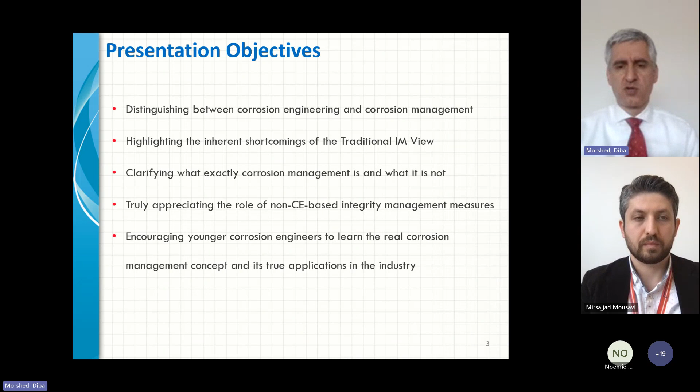And the last objective is to encourage younger corrosion engineers to learn the real corrosion management concept and its true applications in the industry. So once we know what corrosion engineering is and how it differs from corrosion management, it becomes easier to deal with corrosion problems from a corrosion management point of view.

So let's go back to the first and the basic question. What is corrosion? We all know that when we have got a metal or an alloy which is exposed in a corrosive environment, we can have an electrochemical reaction taking place, and that electrochemical reaction will result in our metal or alloy to gradually lose thickness, and its characteristics like toughness, like strength would gradually change.

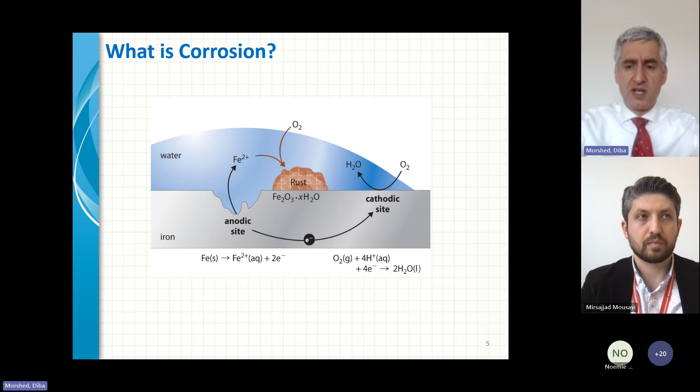And for us corrosion engineers, this loss of thickness becomes very important, because if we are dealing with a system which is under pressure, we all know that below certain thicknesses our equipment can start exploding. So, corrosion is still a universal integrity issue, as I said, in spite of all the latest technological advances in metallurgy, in chemistry, in inspections, in electronics, in coatings.

Corrosion in many industries is still a major issue, and the question we have to ask ourselves is what or where this gap is. Why do we still get corrosion? Maybe the way we have been trying to control and mitigate corrosion has not been a thorough or efficient method. And if that's the case, then what is the better solution?

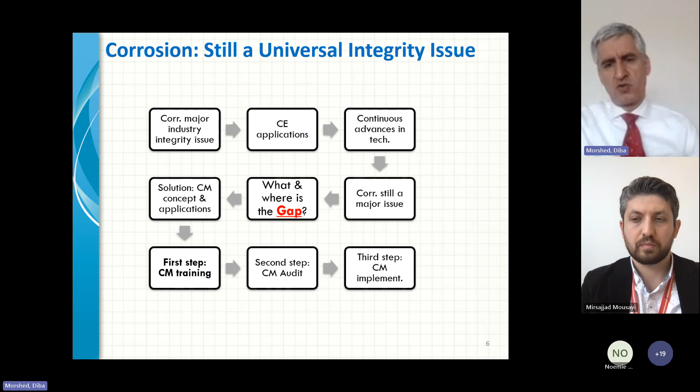It appears that a better solution is offered through corrosion management applications. And for us, the first step would be to know and to define what corrosion management is, to get training on corrosion management, and then to proceed on implementing corrosion management.

I was talking about this gap earlier. I've got a few examples for you. These are very sad examples because you can see how easily we can make trivial and childish mistakes and then get corrosion and corrosion failures.

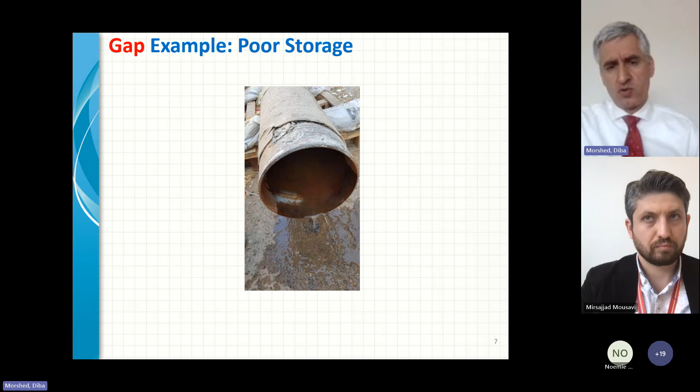This is a pipeline section just arrived from storage, and it's ready to be fitted into a pipeline which is being constructed. As you can see, this section has water, and water is pouring out of this section, and it has already suffered from tangible internal corrosion. And obviously, when you use such corroded items when building a pipeline, you should expect a much lower operational life from your pipeline than if you were to use pipeline sections in pristine conditions.

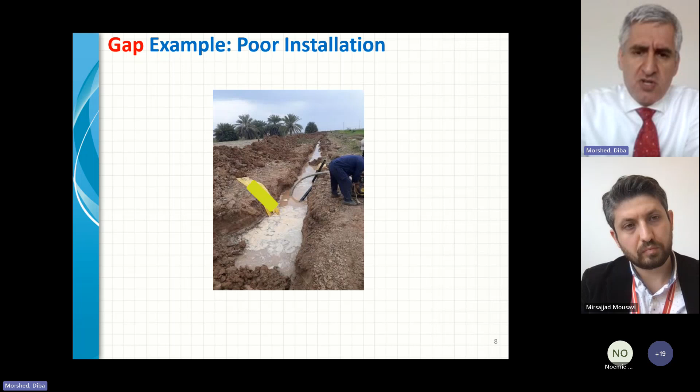There were many cases that I was amazed with internal corrosion cases associated with dry gas distribution systems, and later I found out that during the construction phase, due to such poor practices, water had entered the system, and later during the operation, they had internal corrosion issues.

Again, here is another example. When we studied corrosion engineering in university, one of the first points that they taught us was not to connect two different metals or alloys in a corrosive environment. Here on the left, we have got a flange made of carbon steel. On the right, we have got a flange made of stainless steel. And they were connected to each other without any isolation.

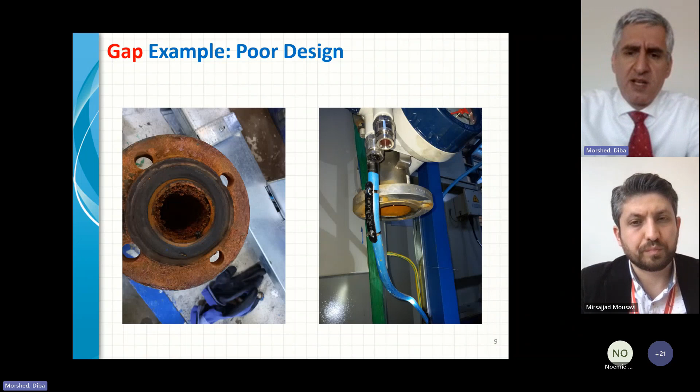And in less than 2 years after commissioning, the carbon steel flange, as you can see, has suffered from extensive corrosion. And the design life or the intended life was to be 30 years, but this is the condition just after 2 years or less than 2 years. And tens of such wrong connections were fitted in this particular project, resulting in extensive corrosion of the carbon steel flanges.

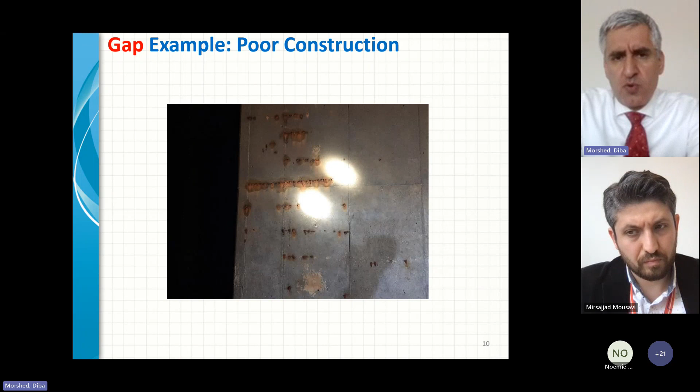Here is another corrosion case. You're looking into a structure made of reinforced concrete, and as you can see, the reinforcement has already suffered from corrosion again shortly after commissioning, and it was simply due to poor construction practices during the construction phase.

Another case: because of poor treatment or processing, we have had treated seawater, but still oxygenated, running through bare carbon steel. And as you know, dissolved oxygen corrodes carbon steel pretty quickly. And we have had a failure here in a very short time after commissioning of this system. Again, it could be regarded as a design mistake, or it could be regarded as a shortcoming in water treatment and not removing the dissolved oxygen from the water stream.

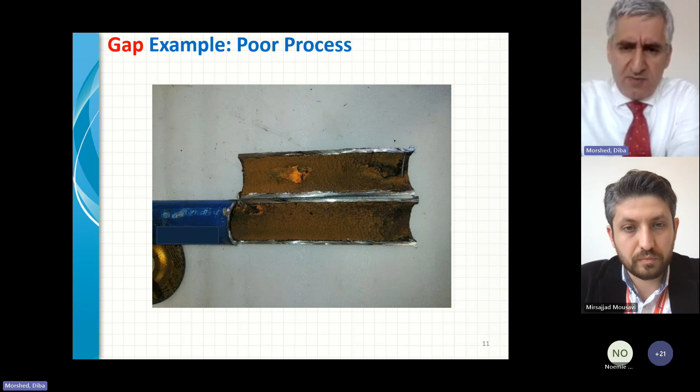So the question is, now we have seen this gap, or we have seen some indications of this gap, but what and where the gap is. If I want to make it easier or to categorize it, I can say that we have got two main different classifications of this gap.

On the left, the gap comes from shortcomings in design, material selection, transportation, installation, purchasing, hydrotesting, operation, inspection, monitoring, documentation, and procedures. And on the right-hand side, I can say the gap is because of changes in the feed composition or changes in operation process, team structure, and methodologies.

Going back to the left column, we just saw some examples relating to some of the points listed here. There are a few other ones, for instance, hydrotesting. You know, when you hydrotest a piece of equipment, you are supposed to use water with a specification: the oxygen has to be removed, it has to be treated with corrosion inhibitor or oxygen scavenger or biocide. And unfortunately, in many cases, the water which was used for hydrotesting did not receive any treatment. It was not injected with any chemicals.

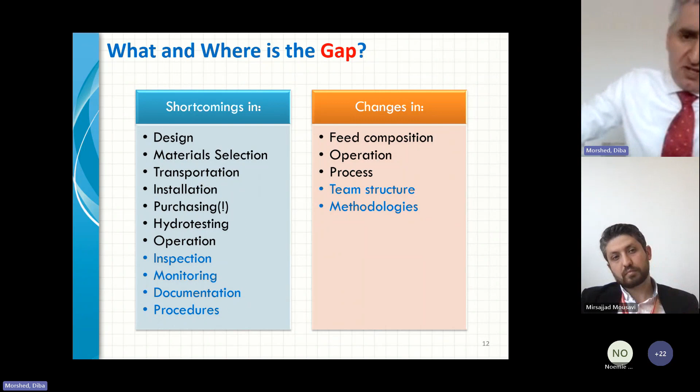And regarding team structure, the example I can give you is that, as unfortunately I've seen several times before, some of the projects or organizations which complain about having a lot of corrosion issues and corrosion failures do not even have a corrosion engineering position in their team structures. And if corrosion is regarded as one of their main integrity threats, it cannot be explained or justified why they do not use corrosion engineers in their companies or structure to tackle corrosion.

So, what creates this gap? If I want to be both precise and concise here, in summary, I can say in 99% of the cases that I've been studying corrosion issues and corrosion failures, two root causes or two culprits have always stood out. The first one has been inadequate communication. The second one has been inadequate competency.

So, in other words, if you tackle competency and communication, if you try to improve these two items, you will see significant improvements in your corrosion control and mitigation systems. You would see that your corrosion control system would function with much greater efficiency and performance. And that brings us to the next point, which is which options do we have for corrosion control and mitigation in our company or in our organization?

At the moment, we have got two options when we create an asset integrity management system, or an AIMS, for our company. Under the AIMS, we are presented with two options. One is to control corrosion through corrosion engineering. The other one is to control corrosion through corrosion management.

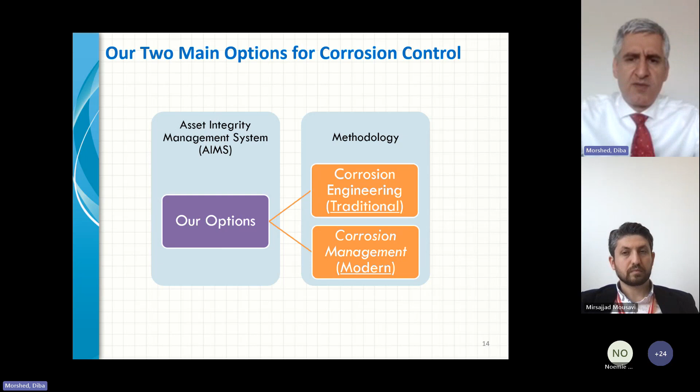The first option, which is based on corrosion engineering, I call the traditional way or the traditional mentality. And the second option, which is based on corrosion management, I refer to as the modern approach or modern way of asset integrity management.

Let's look into corrosion engineering first, because later I will be defining the concept of corrosion management, and I would like to clearly distinguish it from corrosion engineering. So if I define corrosion engineering, then it would be easier for us to understand what exactly corrosion management is.

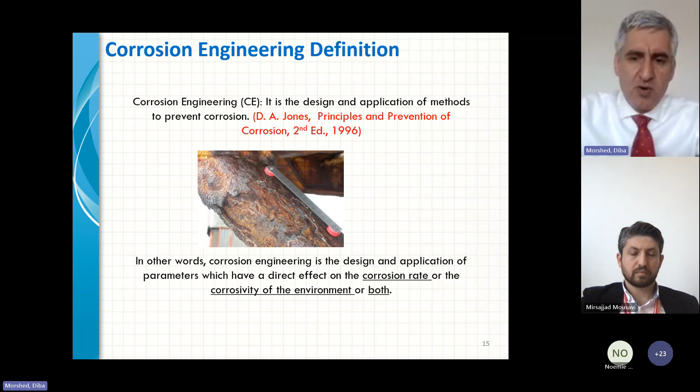Corrosion engineering can be defined as the design and application of methods to prevent corrosion. In other words, corrosion engineering is the design and application of parameters which have a direct effect on the corrosion rate or the corrosivity of the environment, or both. Let's look into corrosion engineering a bit more closely.

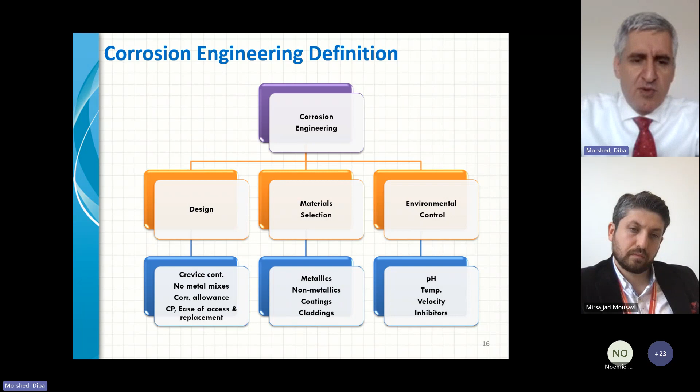Corrosion engineering has got three main components: design, material selection, and environmental control. So if you decided to proceed with corrosion engineering, you have got these three components. Under each component, you have got more options. For instance, under design, you have got crevice control, no metal mixes, corrosion allowance, use of a cathodic protection system, and ease of access and replacement during the operation stage.

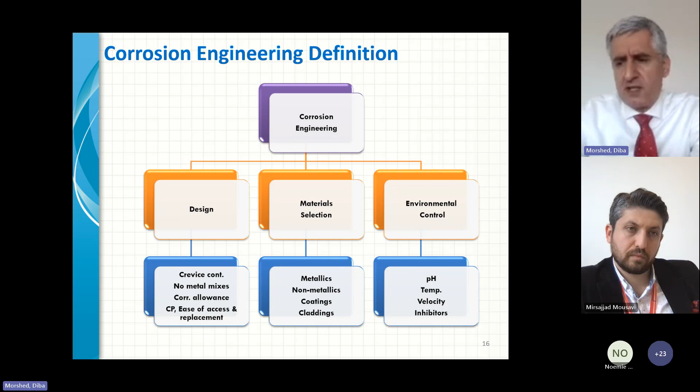Under material selection, you have got these options: using metallics or non-metallics, using coatings, and using claddings. And under environmental control, of course, you have got pH control, temperature control, velocity control, and using inhibitors, corrosion inhibitors, scale inhibitors, or adding other chemicals into the system like biocides or oxygen scavengers or any other type of chemical intended to control and mitigate corrosion.

And that takes us to the traditional integrity management view. It is defined as the notion that corrosion control or mitigation is mainly implemented via the corrosion engineering discipline. This notion is referred to as the traditional integrity management view. So it says if you are working in any industry and you have got a corrosion problem, then corrosion engineering is your solution. And corrosion engineering has got three components: design, material selection, and environmental control.

So it tells you that if you have got a corrosion problem, if you want to identify it, then focus on design, material selection, and environmental control. Then if you want to rectify it, again, your solution has to come from one of these three components or a combination of them. It does not take into consideration non-corrosion engineering factors.

For instance, it doesn't tell you, if you are visiting a project or a company which is suffering from a lot of corrosion problems, to look into their team structure and see whether they have got a corrosion engineer or not. As I said, some projects or companies which have been complaining about having a lot of corrosion issues are those which have not recruited a corrosion engineer. So there is not a specialist who can help them to tackle their corrosion problems.

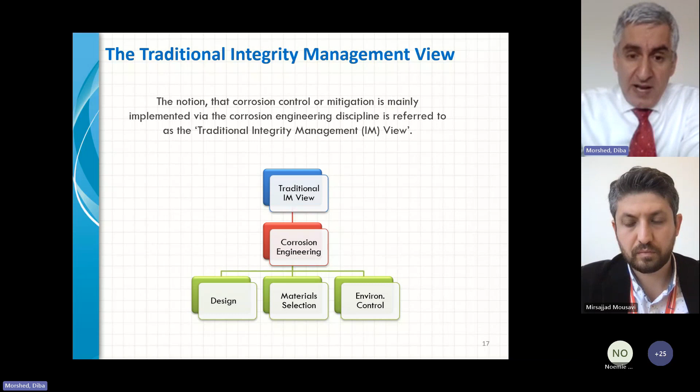Let's look into the traditional integrity view in more detail. More precisely, the traditional integrity management view, when trying to tackle corrosion problems, mostly takes into account corrosion engineering based factors or parameters, which have a direct effect on either the corrosion rate or the corrosivity of the environment or both.

That is, in many cases, it does not take into consideration the non-corrosion engineering based or non-technical factors or parameters such as inspection, corrosion rate monitoring, fluid sampling, data management, communication, competency, corrosion control matrices or plant integrity windows, and even the presence of the corrosion engineering position.

It is very important, if you are a corrosion engineer and you have been tasked with corrosion control and mitigation for a company or for a project, to take into consideration both CE-based, corrosion engineering-based, and non-corrosion engineering-based parameters. An example I have given here is data management.

So many times I have come across oil and gas operators that collect various data like inspection, corrosion monitoring, and fluid sampling, but they never analyze and process the data. They accumulate data for several years. Then after several years, they come to you and say, we have got this wealth of data, and we would appreciate if you can process our data, analyze our data, and tell us what is happening with our assets or equipment in regard to corrosion.

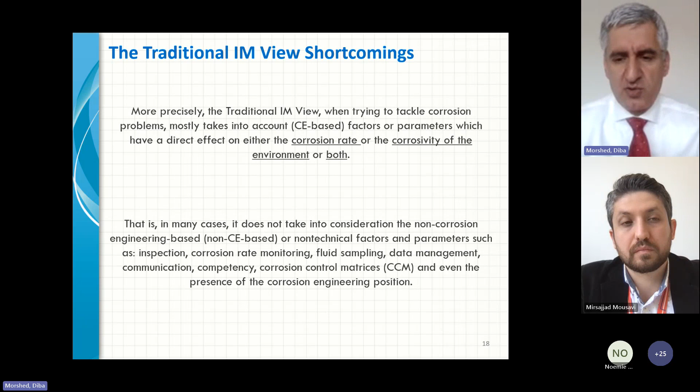methods should be. In many of the oil and gas assets that I have visited, they still do not know what corrosion mechanisms they are dealing with. As such, they cannot devise the relevant corrosion control measures, because if you don't know what mechanism you are dealing with, how can you decide how to tackle it or how to mitigate it?

Because in many cases, the root causes of the encountered corrosion issues and failures are non-corrosion engineering based or non-technical factors or parameters, the traditional integrity management view has a limited capability in correctly and comprehensively identifying and then rectifying such corrosion issues.

Therefore, for proper and thorough asset integrity management, the asset operators or asset owners require a more thorough view, approach, or mentality which takes into account both corrosion engineering-based and non-corrosion engineering-based factors and parameters. Hence, the advent of the corrosion management concept.

When I started working as a corrosion engineer back in 2002, my mentor, who was an extremely experienced corrosion engineer, told me, Ali, be careful, because what we were taught in university is not going to be fully useful here. There are still many other things that we have to take into consideration. I said, like what? He said, like the factor of communication or the parameter of communication. Communication, or more precisely, the lack of communication, can contribute to a great deal of corrosion problems.

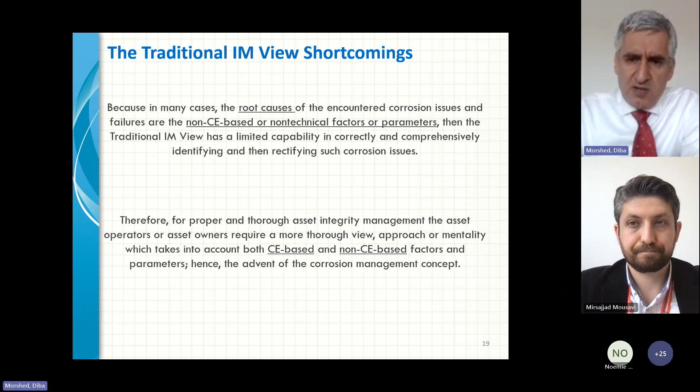then in other industries. So if we have realized that the traditional integrity management view, which takes into consideration only corrosion engineering based parameters, is not capable of thoroughly and efficiently controlling and mitigating corrosion, then we have to move forward into another mentality or approach or model which takes into consideration both corrosion engineering and non-corrosion engineering parameters and factors. Hence, the definition of corrosion management.

Unfortunately, there are many different definitions of the corrosion management concept being offered at the moment. Some of them simply assume that corrosion management and corrosion engineering are identical. Some of them claim that corrosion management is risk-based inspection. And there are some other funny definitions for corrosion management, but in my humble opinion, they are not very practical ones.

Here, my preferred definition is that corrosion management is the process of reviewing the required integrity management measures, regular monitoring of their performance, and the assessment of their effectiveness post-commissioning. So the corrosion management definition offered here has got three processes inside it. The first one is the integrity review, followed by performance monitoring, and then the last one is the assessment of the effectiveness.

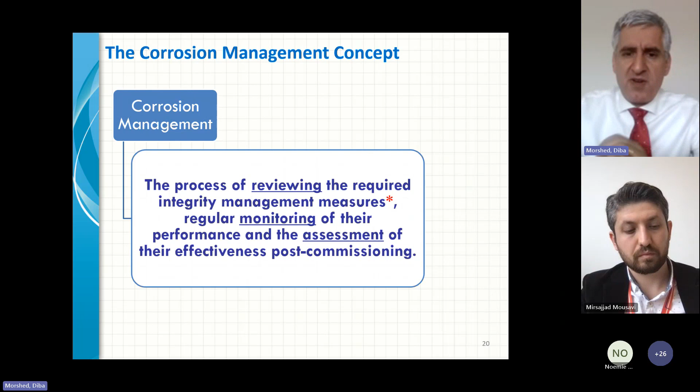And that takes me to another very important definition, which is the definition of the integrity management measure concept. It says anything which contributes to the overall integrity management system or influences its functioning and outcome. Integrity management measures are either corrosion engineering based or non-corrosion engineering based, and examples include design, material selection, communication, competency, and procedures.

Here, I am trying to highlight a very important distinction between the traditional integrity management view and the modern view, which is based on corrosion management. In the old view, as a corrosion engineer, you only would be concerned with the corrosion engineering integrity measures, such as design, material selection, and environmental control. But here I'm saying, because of so many corrosion issues we have had that had their root causes in non-corrosion engineering based factors, then as an asset corrosion engineer, when you are trying to tackle corrosion, you have to take into consideration the non-corrosion engineering based parameters as well.

For instance, if they are not carrying out inspection, you have to ask why. If they are carrying out inspection, but it's not risk-based, it could be time-based, condition-based, or consequence-based, you have to ask them why they are not using risk-based inspection. We all know that if you use a risk-based inspection methodology, the corrosion failure preemption capability of your company can be improved, because a risk-based inspection, if the inspection scope is determined using the criterion of risk, could help you to preempt your corrosion failures before they turn into failures. So this is very important.

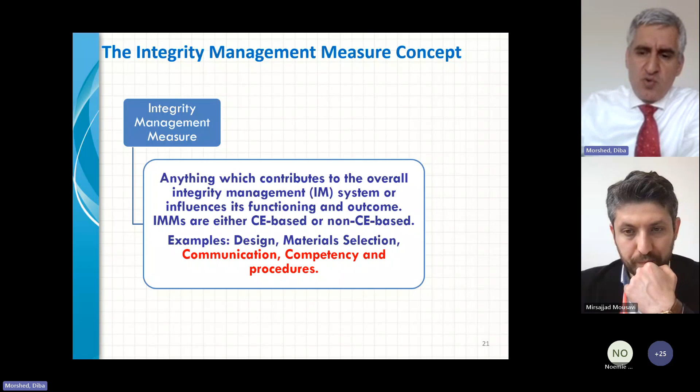As a corrosion engineer, your integrity management measures are divided into two different classes: CE-based, corrosion engineering based, and non-CE based, non-corrosion engineering based. If you want to successfully control and mitigate corrosion, please take into consideration both of these different classes. And that brings us to a typical corrosion management model.

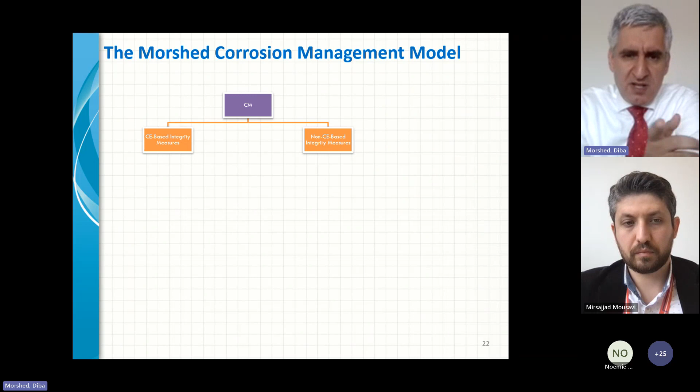At the moment, we have got, I believe, at least three well-known corrosion management models. The one I'm presenting here emphasizes the fact that corrosion management, the purple box, covers both corrosion engineering-based and non-corrosion engineering-based integrity measures. On the left, we have got the three boxes: design requirements, material selection requirements, and environmental control requirements. They relate to the corrosion engineering integrity measures. And on the right-hand side, we have got four boxes: inspection requirements, corrosion rate monitoring requirements, management requirements, and failure risk assessment requirements. The third box, the management requirements, I call them management requirements because the parameters listed underneath have to be managed properly.

And in my humble opinion, I have listed 12 parameters there, and these are extremely important and totally indispensable for any asset corrosion engineer who is interested in thoroughly and comprehensively controlling and mitigating corrosion in their pertaining assets. These 12 parameters include registers, strategies, procedures, data types and their processing, databases, documentation, communication, asset corrosion control document, corrosion control matrices or plant integrity windows, KPIs, key performance indicators, team structure and competency. As I mentioned earlier, communication and competency are the two most important parameters here.

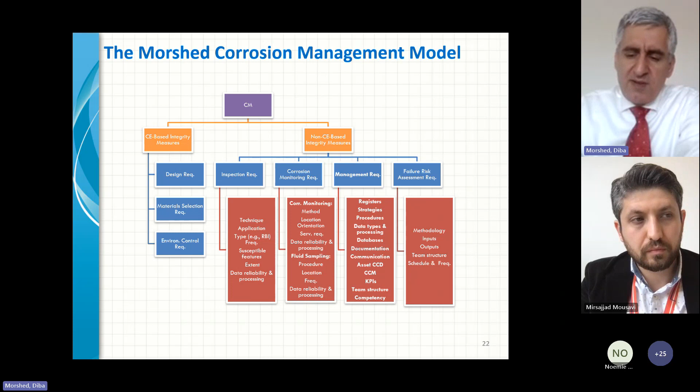If actions are assigned to different individuals related to existing corrosion problems, and those actions are capable of resolving the existing corrosion issues. If regular corrosion reports are produced, if such regular corrosion reporting leads to annual corrosion reports or annual integrity reports being produced. So these are all components of communication, and through improving communication, you would be able to significantly improve corrosion control and mitigation in your company.

And corrosion management applications bring about many benefits. I won't go through all of them, but here are a few examples. Determining existing and future corrosion damage mechanisms. As I said, unfortunately, in many of the operating companies visited, after more than 10 years, they were not sure what exactly their corrosion damage mechanisms were. As such, they could not come up with a solution to tackle those particular damage mechanisms because they didn't know what actually was causing the corrosion.

And this situation had been going on for many years, resulting actually in no actions against corrosion problems. And they were spending a great deal of money on repairing, replacing, and the assets suffered from a lot of unplanned operation shutdowns.

Devising or improving the relevant management measures. As I said, under management requirements, we had 12 items. If you focus on those 12 items, you would be able to make significant improvements in terms of corrosion control and mitigation in your company.

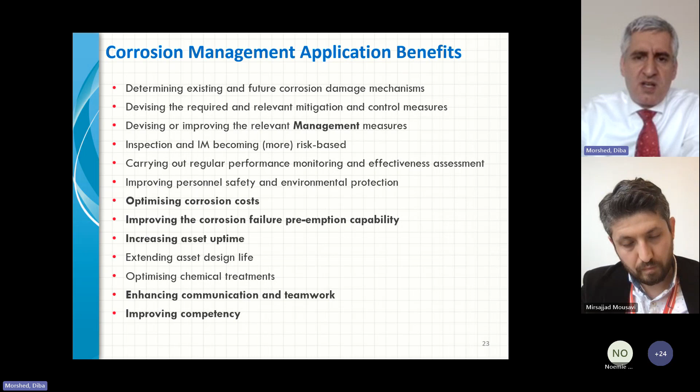of time and costs. Increasing asset uptime, extending asset design life, enhancing communication and teamwork, and improving competency. So these are different benefits of corrosion management applications. And that brings me to conclusions.

The first one, corrosion remains a major integrity threat for many industries. The traditional integrity management view keeps failing to efficiently and thoroughly mitigate corrosion because it relies only on the corrosion engineering concept. The corrosion management approach offers significantly more options for both the identification and then the rectification of corrosion

issues. As I said, when you visit various assets, sometimes their shortcoming or their fault is not on the corrosion engineering side, but on the non-corrosion engineering side. So for instance, they are carrying out inspections, but the inspections they are carrying out are time-based, and

not risk-based. By changing their inspection to risk-based, they would be able to better realize which areas are suffering with higher corrosion rate, and as such, plan ahead for their better corrosion control or mitigation or their future repair and replacement. Hence, fewer unplanned operation shutdowns.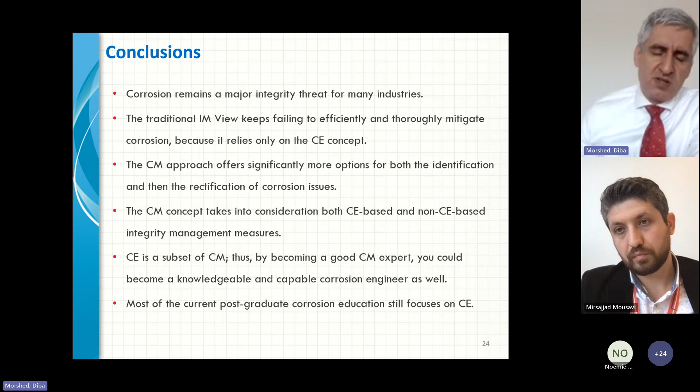And the last conclusion is most of the current postgraduate corrosion education still focuses on corrosion engineering. As I said, I spent years and years in different universities learning about corrosion, but not a single time was I even told about the significance of communication and how by improving communication we can improve corrosion control and mitigation. And that brings me to recommendations, very few simple recommendations.

The first one says, when looking for corrosion management products and services, ensure that they are not merely corrosion engineering ones, being marketed, packaged, and promoted under corrosion management guise. The problem we have got at the moment, as I said earlier, because corrosion management is increasingly becoming more popular in various industries, more individuals and companies are offering corrosion management services.

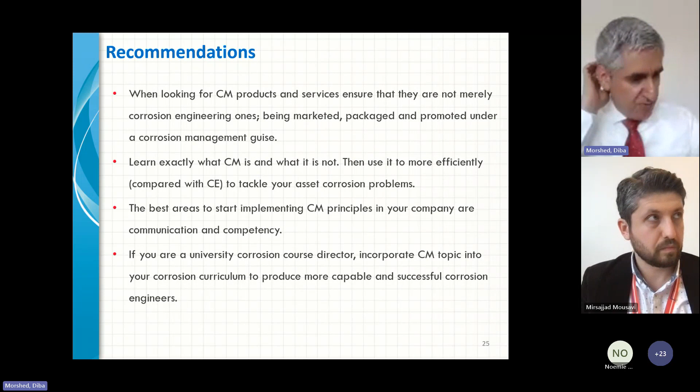When you come across such individuals or companies, ensure that whatever they are offering covers both corrosion engineering based and non-corrosion engineering based integrity measures. In many cases, when you look through what they are offering, you see they are only offering services in the areas of design, material selection, and environmental control, which makes their services pure corrosion engineering based, but they are nevertheless marketing and promoting their services under a corrosion management title.

Learn exactly what corrosion management is and what it is not, then use it more efficiently compared with corrosion engineering to tackle your asset corrosion problems. As I said, when it comes to corrosion management, because it covers more types of integrity management measures under its definition, it provides you with more options to identify and rectify your problems. So it can help you to more successfully and more efficiently control corrosion in your asset.

The best areas to start implementing corrosion management principles in your company are communication and competency. These two items I discussed before. This is just a reminder, and it won't cost you an extra single penny.

If you want to start implementing corrosion management in your company, just review and find out whether you have got adequate communication and competency within your integrity management team or not. If the answer is no, then try to improve on these two areas. And the last recommendation says, if you are a university corrosion course director, incorporate the corrosion management topic into your corrosion curriculum to produce more capable and successful corrosion engineers.